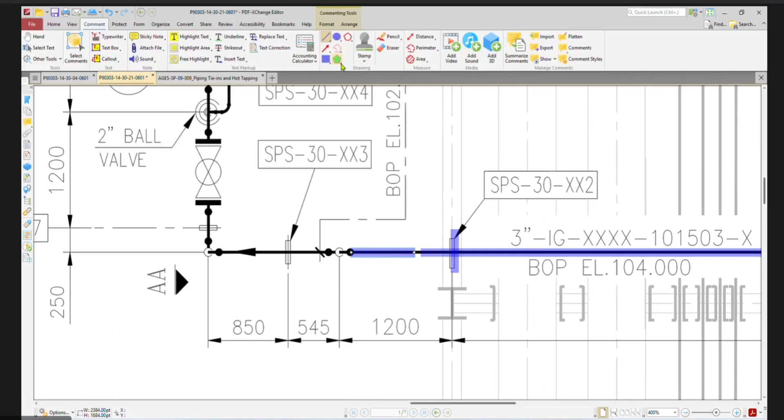This line dropping here will be supported from the grade up to the nozzle. Initially the line is running almost 2 meters from the grade, and it is dropping maybe 600 mm. Yes, that's what.

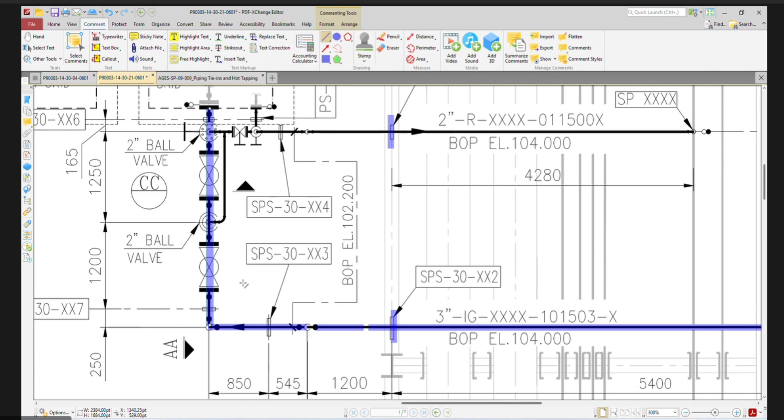Okay good, good guys, so for this point of view we are okay. Now we'll share my screen. Thank you Santosh. Yes, thank you.

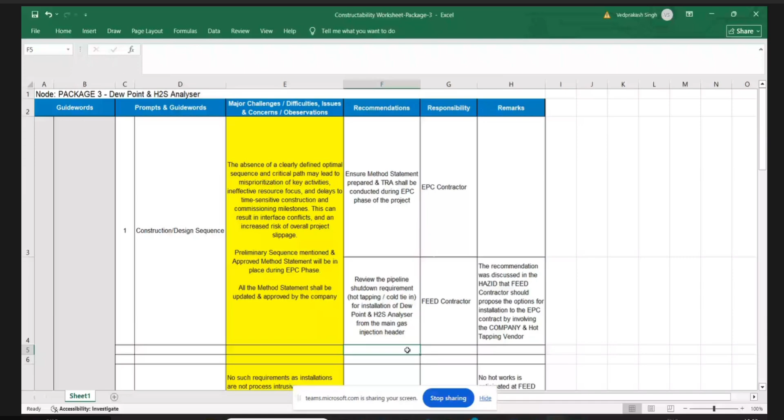I will have to take one recommendation regarding optimizing the number of people while working in the brownfield, because I optimize the maximum number of... right, right, in the...

Why this is very important: to protect our construction people. So probably this should go in the EPC scope of work, or the FEED contractor has to give the prelim information on how much maximum people are required to work on the live equipment, as well as for construction and installation of the structure support.

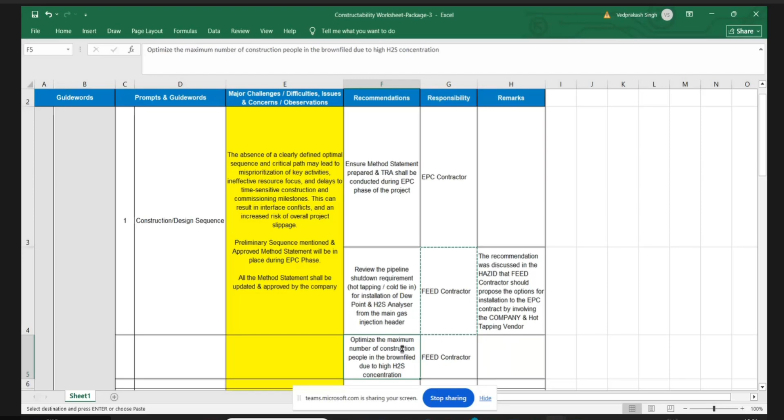So this is also an important part we discussed. I am keeping it the same. Going for the next shutdown that we have mentioned, that shutdown we do not know, so we'll put the same thing.

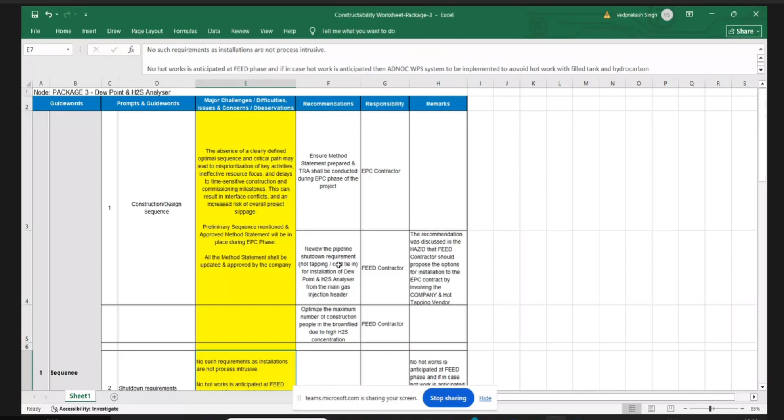Review the pipeline shutdown. This is the same recommendation I'm going to put here. And the shutdown.

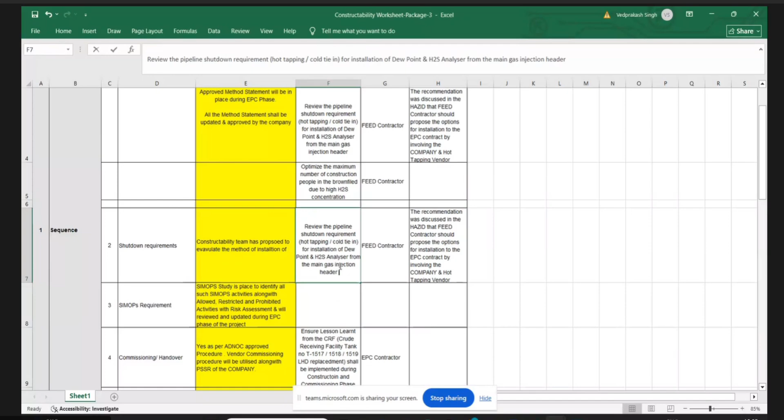Method of installation. Yes, so we have taken the same recommendation.

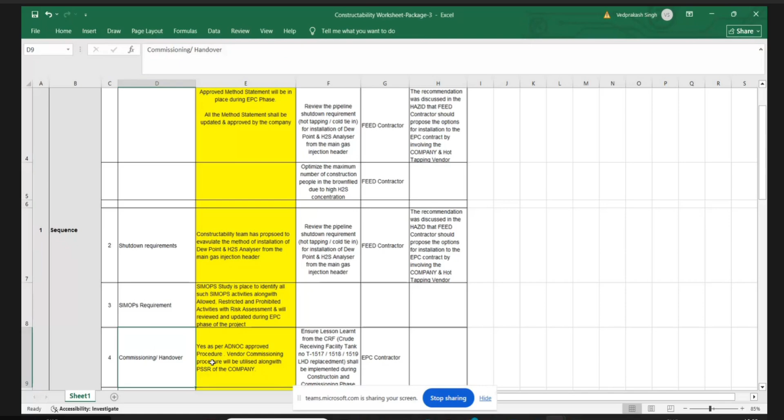That is okay, and SIMOPS, yes, SIMOPS study is going to be there, and this will be revisited in the EPC phase. So we are going to see the SIMOPS activity after this constructability. Commissioning and handover should be done as per the ADNOC system, and PSSR will be there.